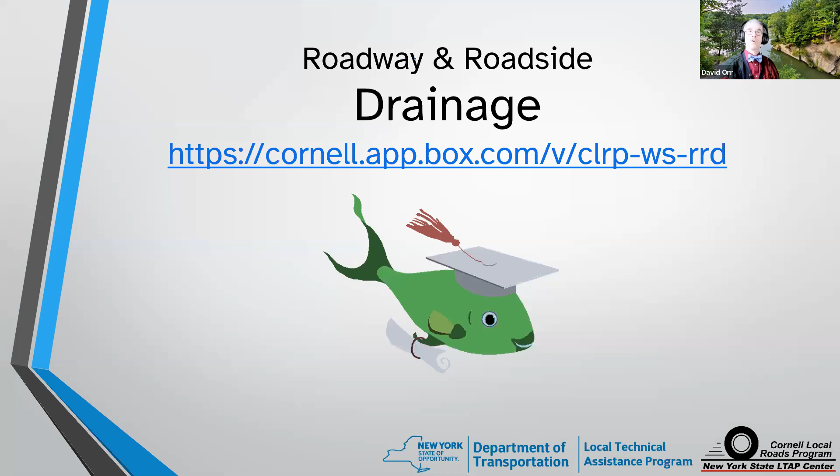A lot of the stuff we're going to talk about today comes from our workbook on drainage called Roadway and Roadside Drainage. You can download it; there's a link to it directly in the chat pod. You don't have to remember this or write it down. You can also just search for it—New York State LTAP or Cornell Local Roads, either one will work. That's what we're going to use. There are references in the back, so some of the things we're talking about come from there. But overall, we're hoping to help you solve your own problems.

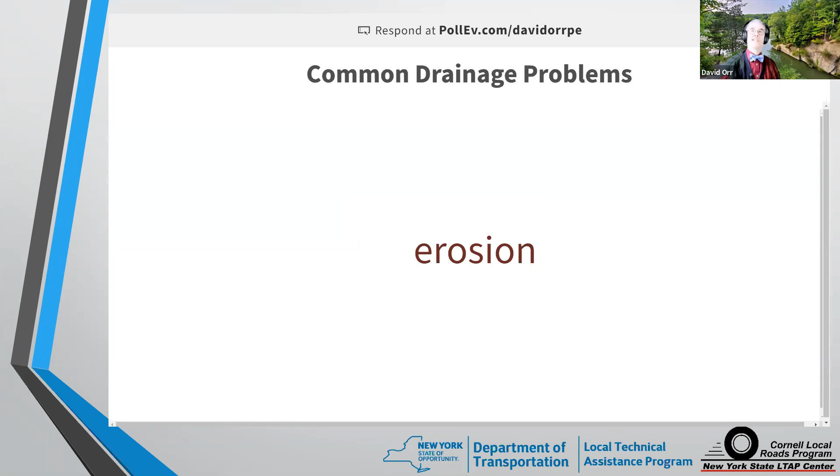Okay, it's all anonymous, and here's our first one: erosion. Yep, that's a common drainage problem. So what kind of problems do you see, especially on roads, that are related to drainage? Sloughs, slides, yep, more erosion. It's getting bigger, a lot of people put erosion down. Flooding, washouts, yep.

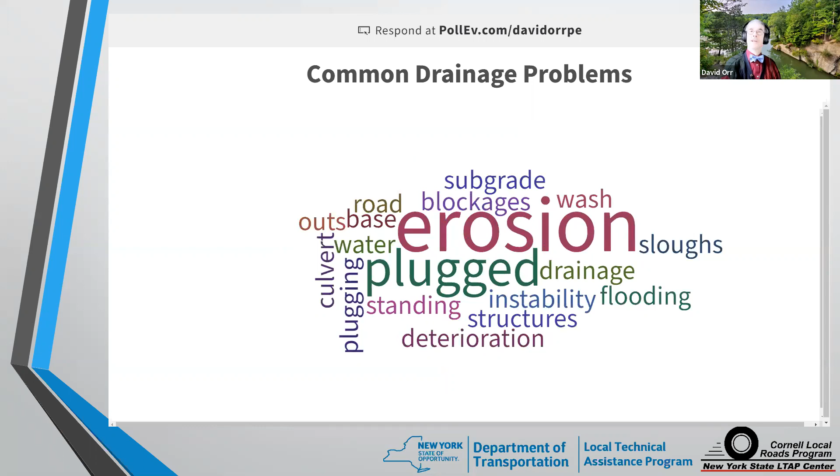Deterioration of the roadway, premature failure, yep. Culverts, structure problems, instability, blockages, standing water, yep. Base issues, yep. Monsoons, floods, yep. Right-of-way issues, which, yeah, if you've got a limited right-of-way, that can cause you problems, okay. Plugging. So obviously, drainage problems are pretty severe when it comes to highways, okay.

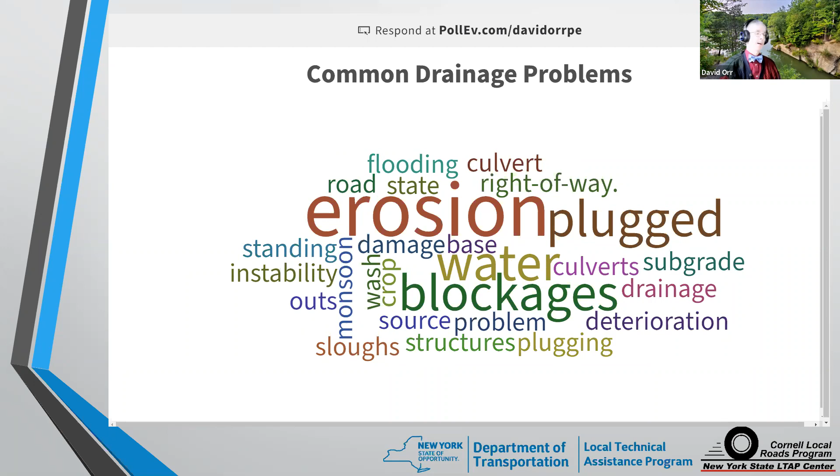Now, when you start thinking about it, look at all the answers we've been given, and that's very true - most of our problems are caused by that. Common drainage problems on roads actually include even more than just erosion, washouts, and culverts. It's actually cracking and rutting of the roadways, heaving. Almost every problem on our roadways is made worse by poor drainage or drainage issues. So what I want to do over this hour we're together is help you solve your own problems.

Now, most people, when we think of drainage, we think of flooding in the spring - actually this was in January, during a January thaw, when you get all that snow melt and runoff and create huge volumes of water. We fear that gets into the roadway system and we wind up with something like this, and we lose the roadway. Yes, that's a drainage problem. But what I really want to focus on are the things we can do ahead of time to maybe keep things like this from occurring.

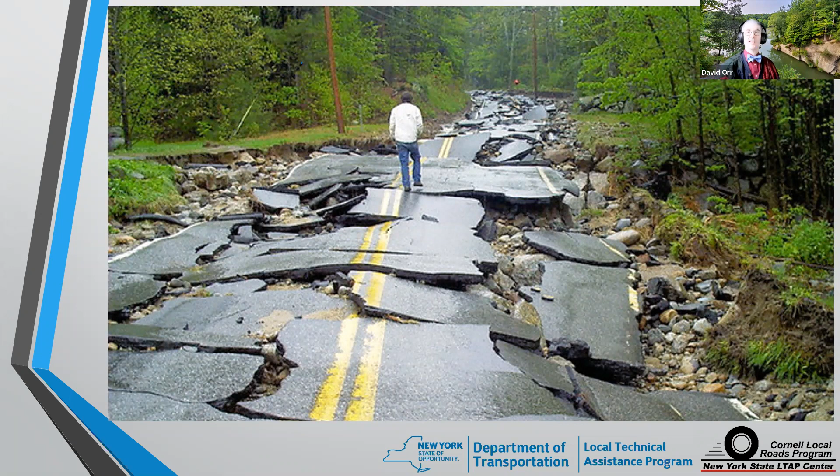Now, of course, one thing that could help is you could employ an army of engineers. Mother Nature has an army of engineers out there: the beaver. But like anything, if something fails, it can actually make the problems worse. So we got to be a little careful with our friends - there are actually times when beaver dam failures can create floods of their own.

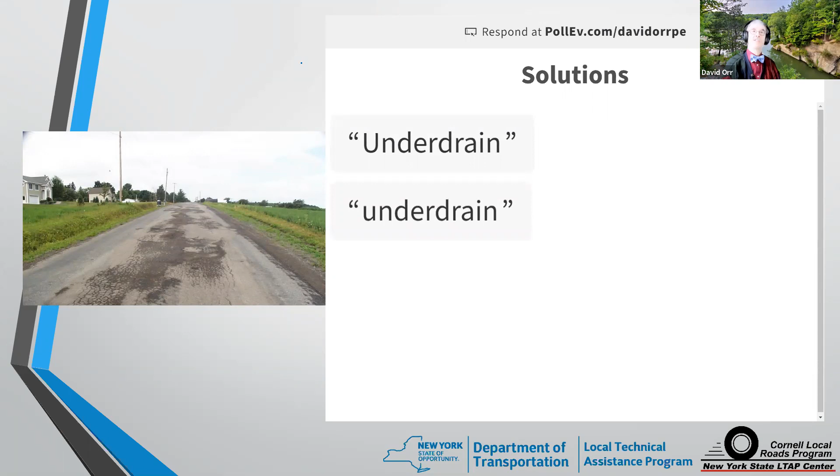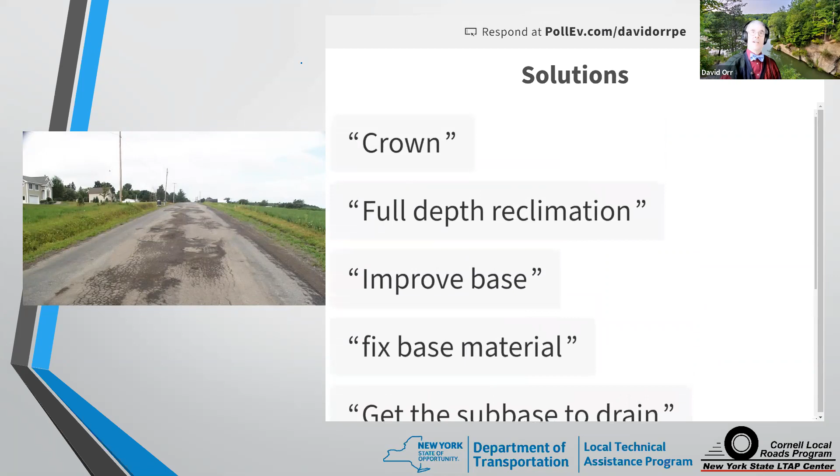A couple of people have put that in - that's good, okay. Maybe a better base, yep, you've got to get that sub-base to drain. Yep, there's water underneath, maybe it's a base problem. Yeah, very good answers - improve the base. Could be a good candidate for full depth reclamation, or sometimes called FDR. Maybe there's not enough of a crown. Okay, so all great solutions.

So let me ask: how do you know whether it's just a crown problem, a base problem, or even if it's a candidate for full depth reclamation? How do you know?

You could do some cores. Cores is a good possibility. You could do a core sample. I like core samples, they're not a bad idea, if you can - and it's not always possible, your budget is definitely part of it.

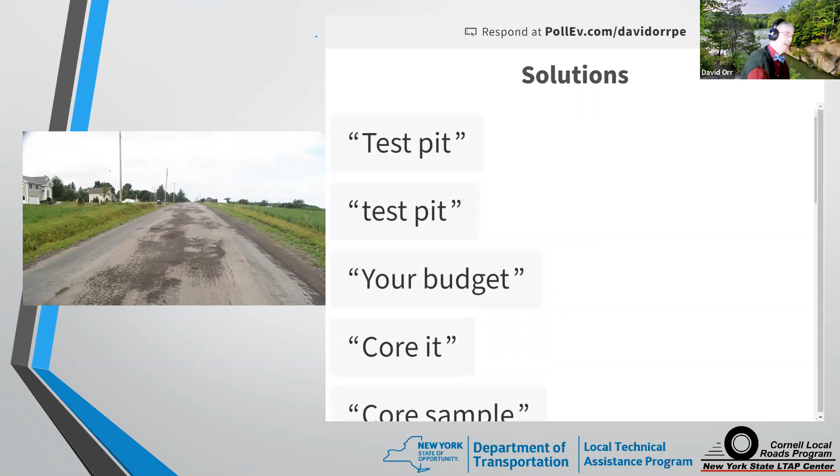I like test pits, and my reason I like test pits is because if I've got a test pit, I can come in and go right across where there's changes and see what's going on. And a test pit, you can set it up so the water drains out if you do it right, so you can see if there's a difference.

It turns out in this particular case, a test pit showed the center of the road, where the bad crack section is, was actually the cleanest. The problem was the outside area was really dirty - none of it so dirty you couldn't reclaim it, but the outside shoulders were really bad, so bad they had to be thrown away.

So as we're talking about solutions, think: how do you confirm what you think the answer is? We're going to stop a couple of times and talk about that as we go through the course of the hour.

Now, this is an old photograph, but you can see a road. This road was chip sealed about 9 months before I took the photograph. We're looking down a hill, road's coming around the corner. Looking at it, what do you think is the problem and the solutions?

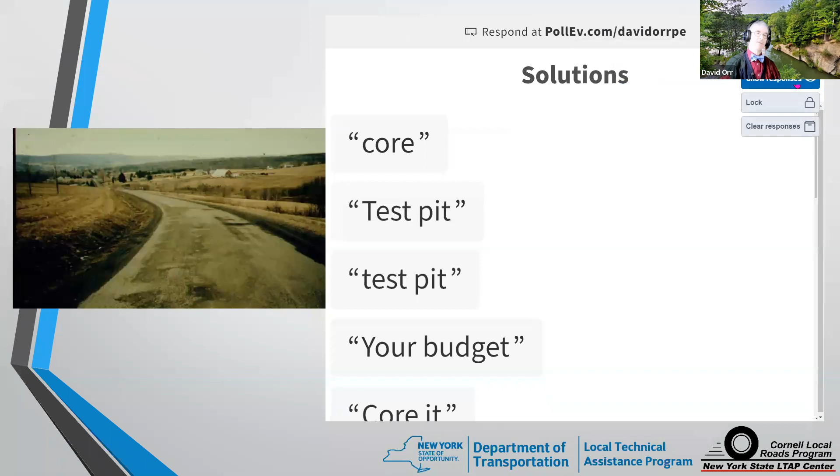Watch this trick, we'll see if this works. I'm going to clear the responses up so we get new responses in. So what do you think the solution is here?

Maybe a full depth reclamation with new gravel? Yeah, it's a possibility. Yeah.

Foreslopes closer to the edge of the road. Maybe there's some problems with the side slopes. Maybe the water can't get away. Maybe the ditches aren't deep enough.

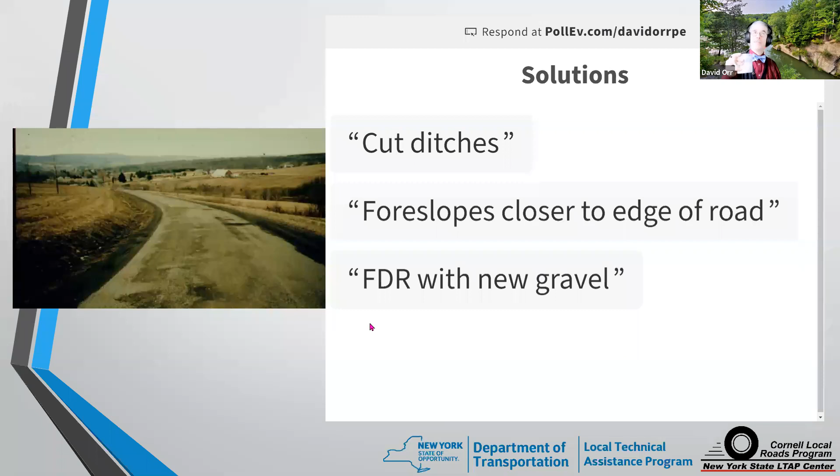It is a possible candidate for edge drains, especially along this inside edge. The hillside, it's always good to look at. Maybe do that.

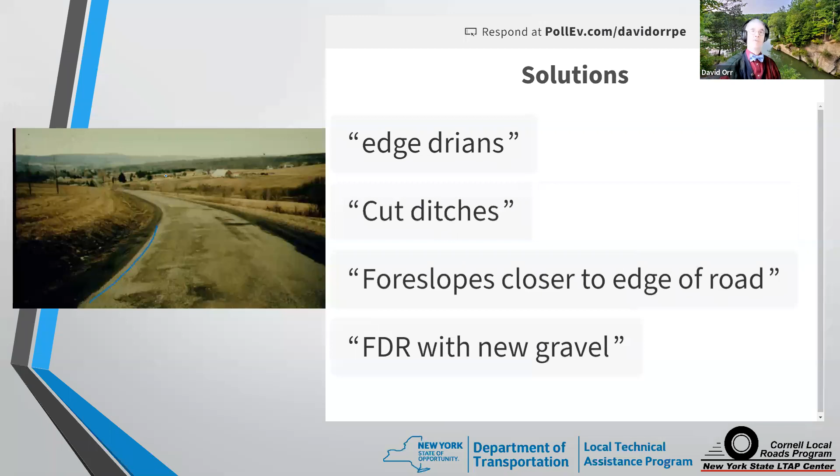Now, a photograph is hard. We're going to see that - it's going to be a challenge for us as we go through. I know that. That's just the nature of the beast.

Just like before, a test pit or a core to see what the fines content is really important. One of the things we know from decades of work is when you look at what's going on, you want the right fines content in your base and sub-base material. Fines, clays, and silts create water problems - they hold on to the water and don't allow it to drain out, even if you've got subsurface drains.

If you've got a paved road, you want to get that fines content under 8%. But if you have a gravel road, you need those fines to bind it together.

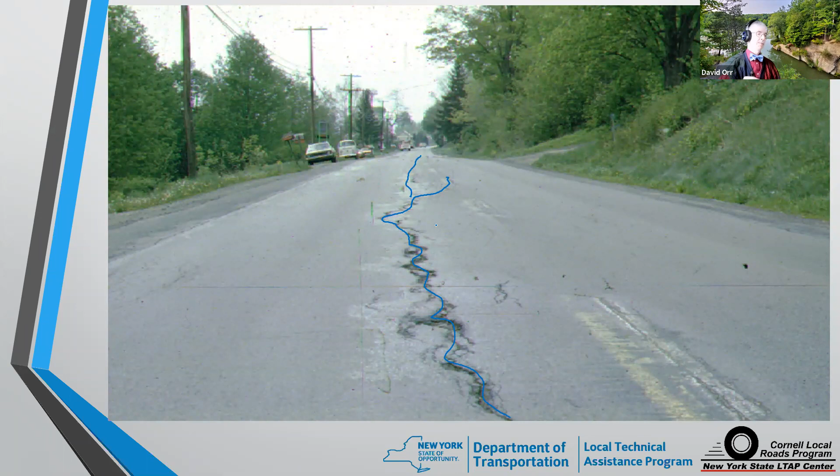So in this particular case, what do you think the problems are? I'm going to clear the responses real quick. I apologize if I got rid of one of yours, so I'm going to make you put it back in. But if you have a question or a comment on a possible solution, go ahead.

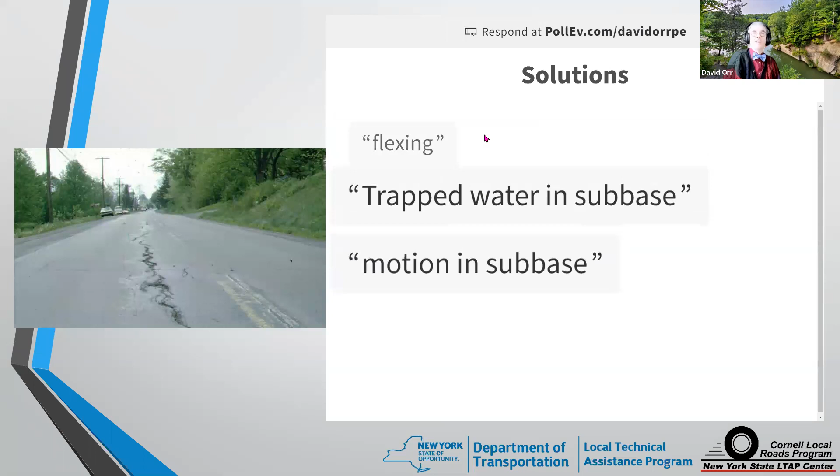So what do you think the problem is? There's movement in the subbase. There's definitely some movement, yeah, some trapped water in there. Yep, absolutely. This is actually one of those trick photographs. It looks like the problem is in the wheel path. Be very careful when you see a crack - just because it's in the wheel path, it may be more common there because of traffic. But if it's moving and meandering like that, it's probably more likely due to other things, like motion in the subbase flexing. In this case, it's actually frost heaving. And yes, it looks like the cut and fill is failing.

Crack sealing is a possibility, but the problem is it's too late. If you think about all the cracks, how parallel they are, if you put them all together and they're more than an inch wide, it's too late. And if you think about it, all these cracks are way too wide. You have to get to them much earlier.

And then, of course, what's the underlying problem? In this case, there's movement between the cut and the fill. If we looked at this from the natural landscape - see if my pen will work right here - it goes from a cut on the right side of the photograph to a fill on the left, and they move differently in the winter due to heaving.

Long term, that's going to be hard to fix, but short term, it might be worth thinking about where that water is coming from. Anytime you've got a side hill situation where the land around the road is tilted from one side to the other, think about catching that water before it gets to the roadway. Maybe a subsurface drain here on the uphill side could be very useful.

They've done some crack repairs, but it obviously didn't quite do what they hoped it would do. And of course, what does this lead to? Well, if you get enough water coming out, you can actually get something like this. This actually was sent in - it's an actual county road, and the water coming out was actually clear. This is water pushing the asphalt up in the spring - a frost boil that's blowing up into a big frost pimple. Again, catching that water before it gets to the roadway is something to think about.

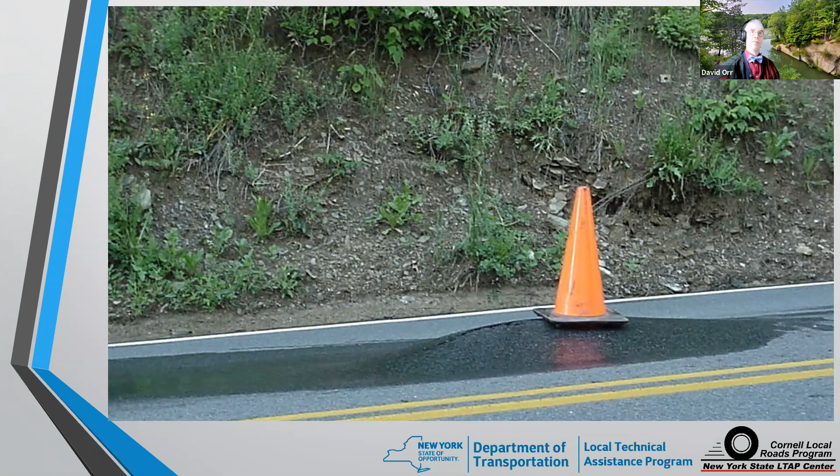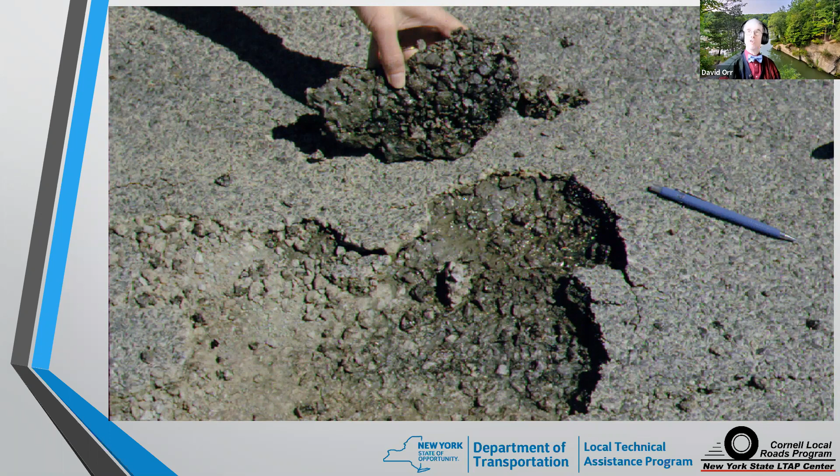Now, of course, that can lead to potholes. So our next problem we're going to look at is a pothole. Now this is a shallow one - we've seen deeper ones. But when you see a pothole, especially with a little bit of water in it, there's a couple of possible solutions beyond just patching. I know you may just patch it short term, but longer term, what do you think the solutions are here for this particular type of situation? When you see potholes, what are you thinking about?

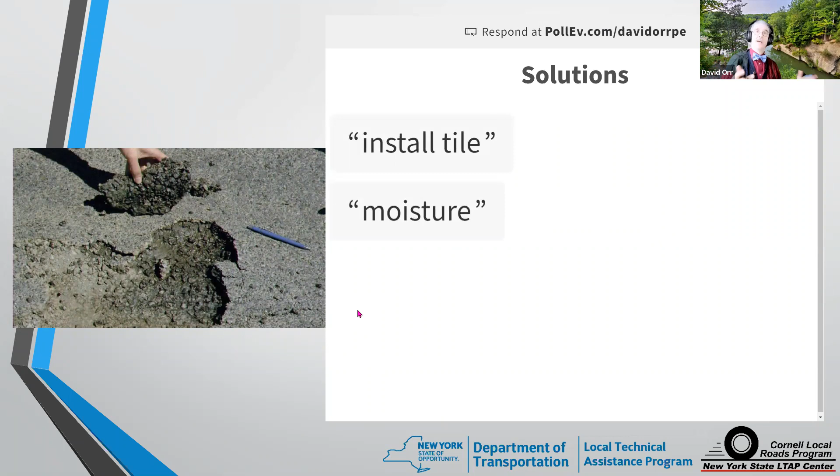Moisture - it almost always comes back to where it is. So you could install tile. That's one of the primary ideas here, or a French drain, which is frankly a subsurface drain that typically doesn't have a pipe. You want to remove that water from the subbase. It could be due to an ice lens freezing underneath, or it could be a base problem. And this is the key - you've all hit on it, really nice job.

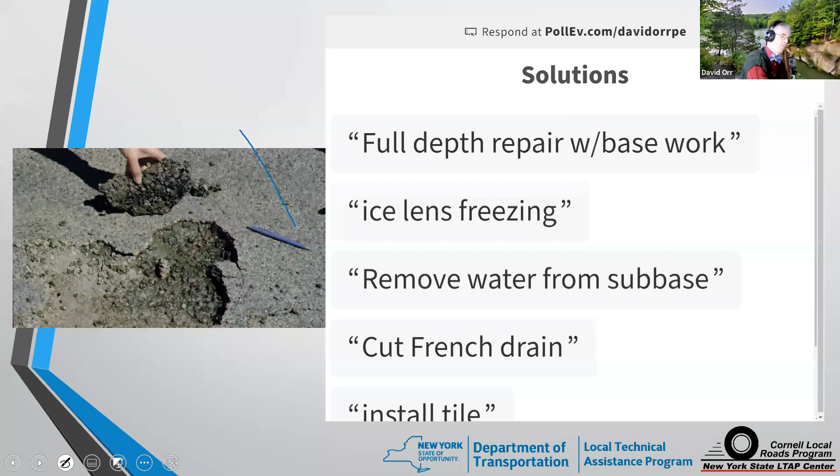If the problem is water coming in from the side, like we saw with that road pimple, the idea would be to install a French drain or tile to catch the water before it gets to the roadway - intercept it. So one possibility is to put a subsurface drain, figure out where the uphill side is, and cut it off. So possibility one would be to put in a drain. I don't know why the computer decided to do that, but we'll live with it. So we put in a drain.

Okay, but if the problem was a dirty base and you put a drain in, what are you going to have next spring? You don't need to put it in. You all know you're still going to have potholes because you've got a soft base. You can't get rid of the water with a subsurface drain if it doesn't want to let it go. If you got a lot of silt and you got a lot of clay, you're going to have more problems.

So make sure you've got the right solution for the right problem, because the other solution here is to just put in rehab, which could be a FDR. It could be boxing it out. Depends how big of an area it is. But bringing in full depth repair with base work, as is in the solutions list.

If, on the other hand, you hadn't checked and you thought the problem was a dirty base and you replaced what was there with clean base, but it turns out it was already a clean base, and the real problem was side water coming in, what are you going to have next spring? You're still going to have potholes. And so you need to make sure the solution matches up to the problem. That's really important, okay?

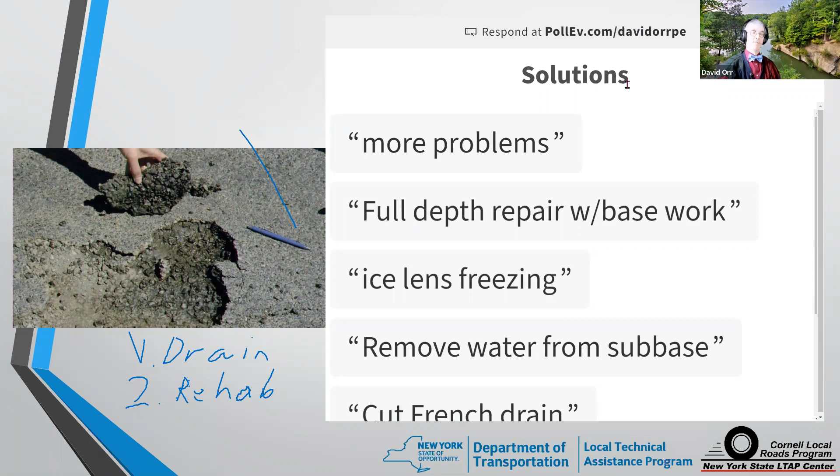So let's go to our next idea to think about. Let's talk about subsurface drains a little bit. This is a subsurface drain, okay? Now, we'll talk a little bit about backfill and subsurface drains. We don't have a lot of time in a 1-hour class, but when I see things like this, I go, ooh, what's going on here?

Now, just for the sake of argument, the water is coming from the right side of the photograph, going to the left. That's a driveway culvert, okay? And you can see there are actually 3 subsurface drains there. 1 white that's got water coming out of it, and 2 black. So what do you think the problems are here? What are the solutions for subsurface drains? I like subsurface drains, but we need to be careful when we install them. What are the concerns here?

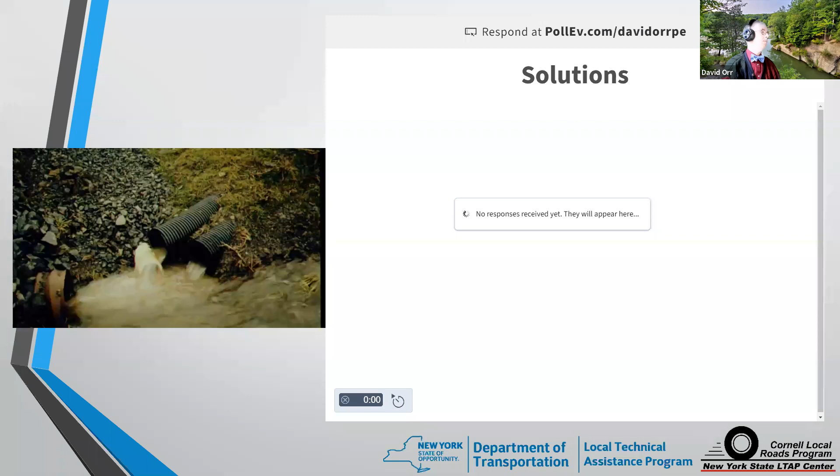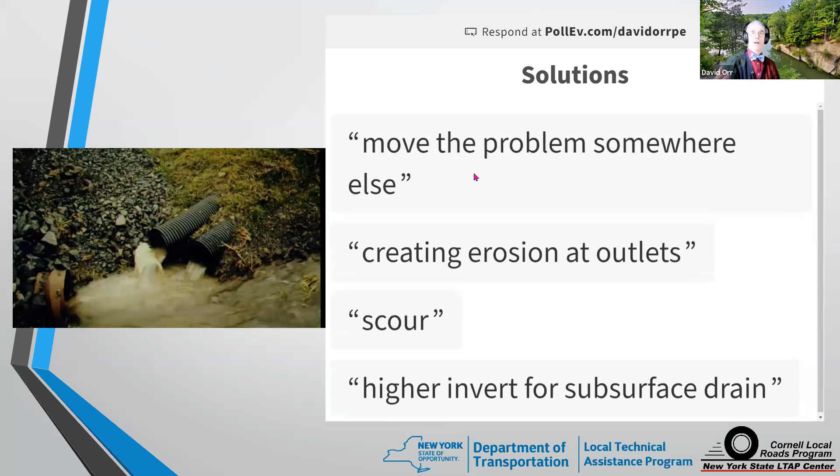You need probably a higher invert. A rule of thumb is you really want to have that 6 inches to a foot below the bottom of the ditch because you know it's going to fill in over time. And by just having it dump out, you can create an erosion problem, okay? And you may be moving the problem. And white pipe is scary. Is that a leach outfall or did they just cheap out?

Anytime you don't have black pipe and you expose it to sunlight, it's going to break down. By the way, the same thing's true with your hard hat when it's not black. Now, I wouldn't wear a black hard hat because it's too hot in the summer, unless maybe you're a Pittsburgh Steelers fan. But they break down.

We add the carbon and other chemicals to help it survive in the sunlight. But if you don't have that, it's going to get brittle, and that white pipe is not long for this world. So really, it's the white one concerns me for a lot of reasons, I agree. And of course, none of these have animal guards on them. And so that would make me nervous as well. Okay.

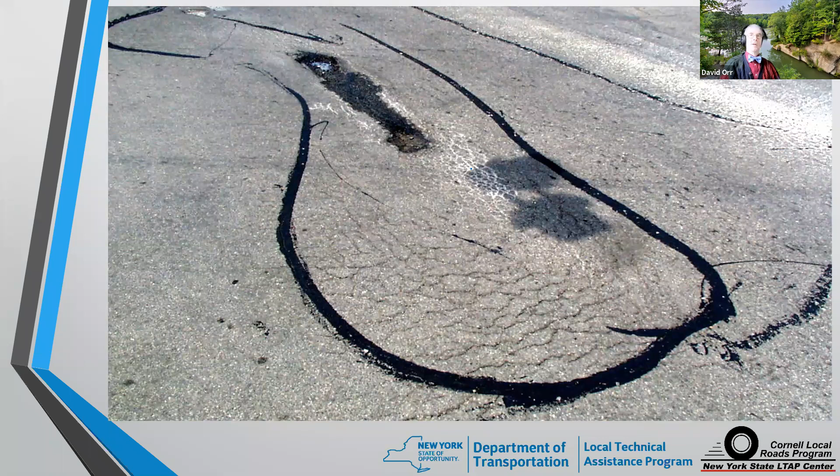Now, again, we don't have a lot of time to talk about it. We're just trying to go basic problems. So now we see a roadway like this. Okay. Cracked. Somebody's done some crack repair. So I don't think crack repair was the right solution here. What do you think is the right solution? And let me clear the responses. There we go. What do you think the proper solution is here?

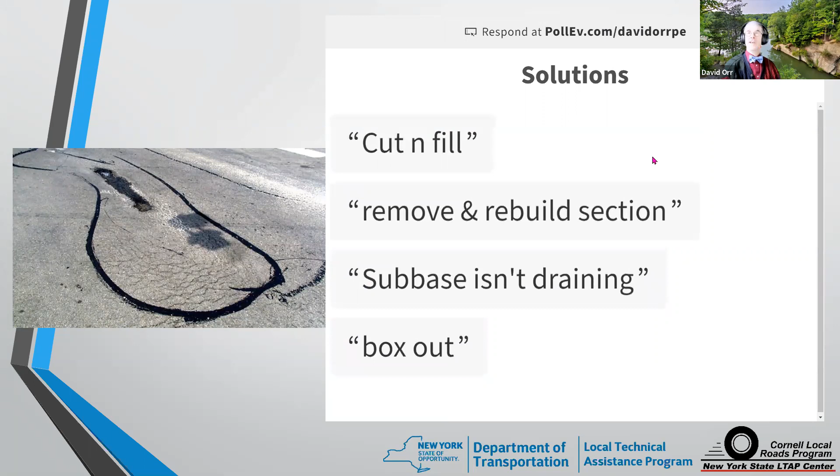You probably got to box it out. Yeah. The subbase isn't draining. In fact, if you look there in the upper left of the photograph, that's water coming out of the roadway. So you're probably going to do a cut and fill or a box out, a full depth repair. How much of it you have to do depends on the length of the roadway that's got the problems. But the reality is, you crack repair, it's too late. And again, that rule of thumb is pretty good.

Just take the cracks and combine them together. And if they were one crack, would they be more than even 3/4 of an inch to an inch wide? If the answer is yes, it's too late. You got a bunch of parallel cracks like this, it's too late. It's already alligatored, as they say. So really, you need to do more than just crack repairing it.

What's even worse is the day after I took this photograph, the agency that owns this particular roadway overlaid it. And of course, within a couple of years, evidence came back. That pothole showed right back up. The cracking showed right back up until they did something much more extensive to fix the problem more permanently.

Okay. I like crack repairs. We don't do enough crack repairs, but pick good candidates. And if at all possible, give yourself at least one season between when you do the crack repairs and any kind of overlay work. And that includes a chip seal. Anything you're putting over the top, give that crack repair time to cure out.

So a great time to do crack repairs, if you want the chip seal or overlay this year, is once the weather breaks. It's actually a good time because the cracks are at about the right width if they're moving as well. So something to keep in mind. Okay.

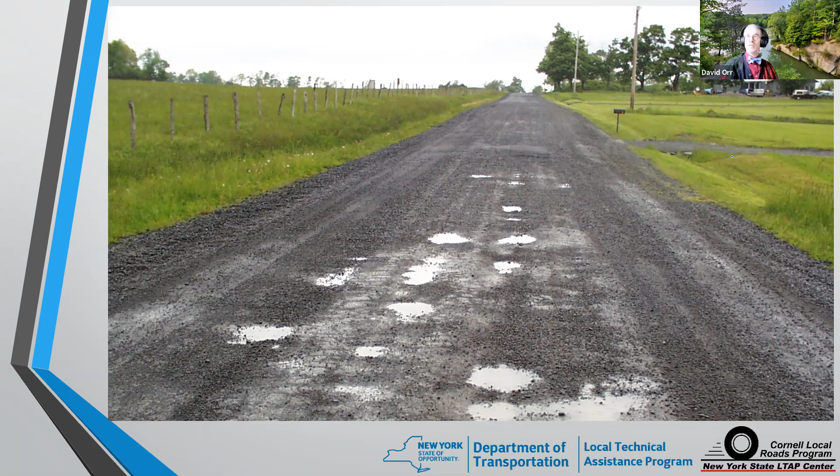So we're going to look at a couple of different road problems, and then we're going to talk about both of them together. So here's the first road. You can see it was a chip sealed roadway, or at least it had evidence that it had been a chip sealed roadway at one time, but the chip seals completely failed. From what I can tell, talking with the highway superintendents, the chip seal never really worked, probably because the base was really better for a gravel road surface. But the problems they're getting now aren't necessarily just due to the quality of the gravel.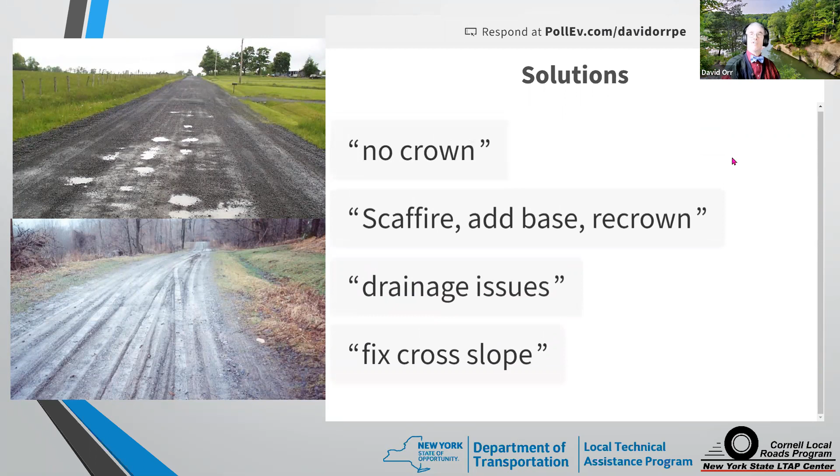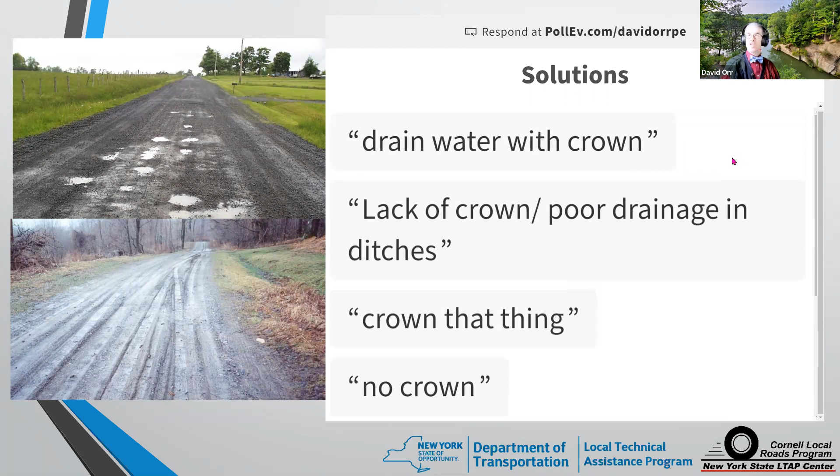Yeah, it's a drainage issue, and the real issue is the cross slope. You got to scarify it. You may need to add base, but the real issue is the crown. Gravel roads, especially, need a crown. And it doesn't matter how good the ditch is. There's a couple places on this ditch that could be better, but the big issue is the crown more than anything else. Gravel roads need a crown. I'd rather see it crowned all to one side.

Here's a photograph taken this past year, and you can see there's a crown on the roadway. That's going to make a big difference. Now, one thing you can note, this is one of the hardest things to do on a gravel road. When you're coming around a corner, because you want that safety with the super elevation, it's hard to not put in a flat spot. So it's something to be aware of and be very careful.

Best thing to do, because it's a gravel road, put it in, check it, and then plan to go back after a year's time and see if it's starting to pothole up. It's relatively easy to fix early with a gravel road. If you wait till the potholes get deep, remember you have to scarify under the depth of the pothole. If you can catch it early, you might just be able to do a little bit of small scarification, put a little gravel, get that crown in there, and walk away. Okay? And as soon as the grass grows, you're in pretty good shape.

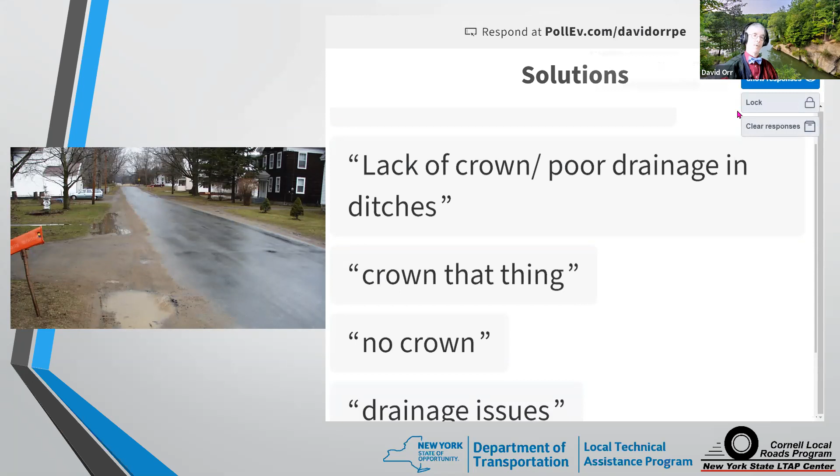Okay, so now we're in more of a hamlet area, or the edge of a village. What do you think the problem is here? Let me clear the responses here real quick. So what do you think the problem is here? No drop inlets? Yeah, in an urban area, whether it's a hamlet or a village or a city, we need to get the water away from the roadway. And a lot of times we have problems. We can't put a ditch in.

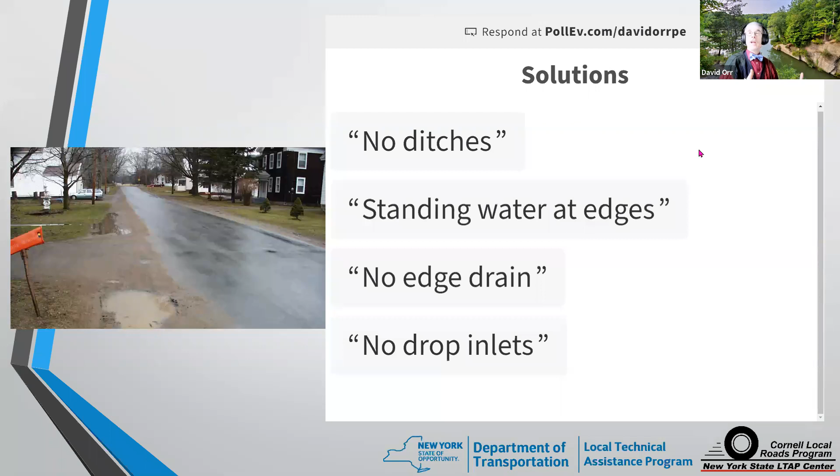You have nowhere to really drain the water. You have nowhere to put the ditches. You may even have curbs and gutter. And so you're going to have to think about subsurface water systems, drainage systems to collect that water. You might be able to get away with a swale in a lot of cases, and you might even be able to put a swale off the roadway. Okay. But you got to think about that water.

You can put an underdrain system in, but realize you need to design it for the volume of water. That surface water is more than most subsurface drains really like. So you may need to account for that and put larger pipes in and think about the outfalls quite a bit. How do you keep the water from the road and how do you take it away? Because that standing water is obviously going to lead to a premature failure. Okay, nice job.

Now, let's clear this and look at the next photograph. So this one, not going to be a solution this time. This is a shoulder on a roadway. Now, it's not a curb and gutter, but we'll come back to the fact that they're similar. What is the purpose of a shoulder? This time it's not the solutions answer, it's what is the purpose of a shoulder? There should be 4 answers here, I hope to see. What is the purpose of a shoulder?

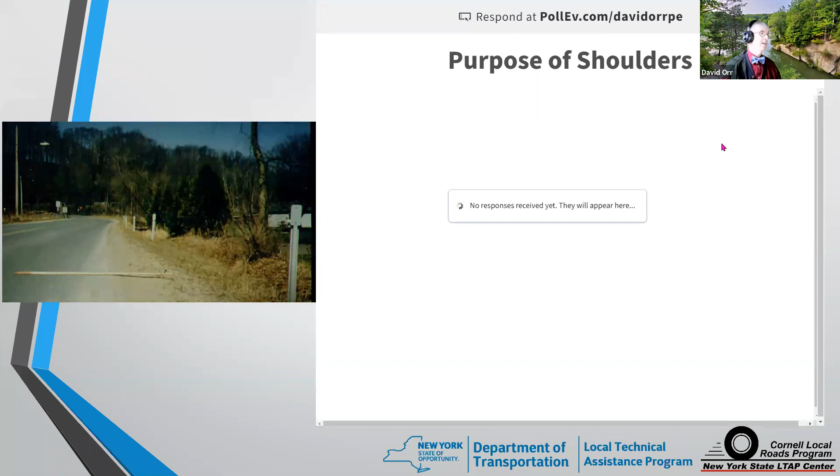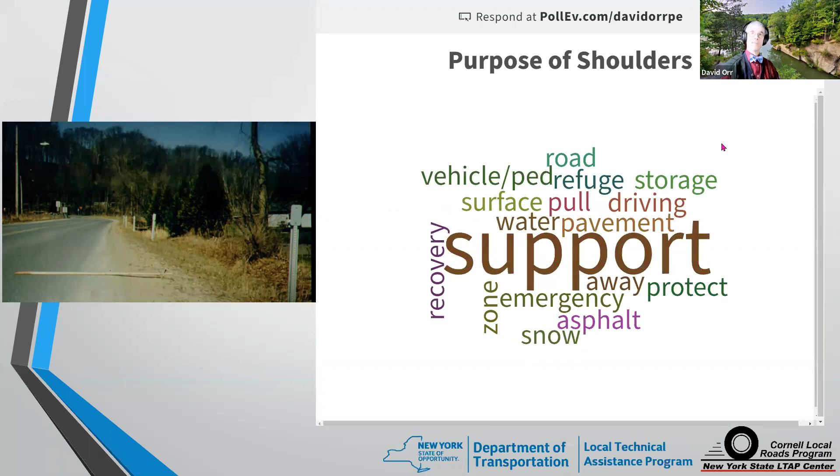Snow storage? Yep. That's usually one of the last things we think about. Okay. Storage, recovery for safety? Absolutely. You know, that errant driver who's paying more attention to their cell phone? Yep. It provides lateral support. It actually helps hold the pavement in. Okay. If you get edge cracking on your roadway, it's probably because your shoulders weren't compacted or your curb and gutter weren't placed real well. Yeah, nice job. Good answers.

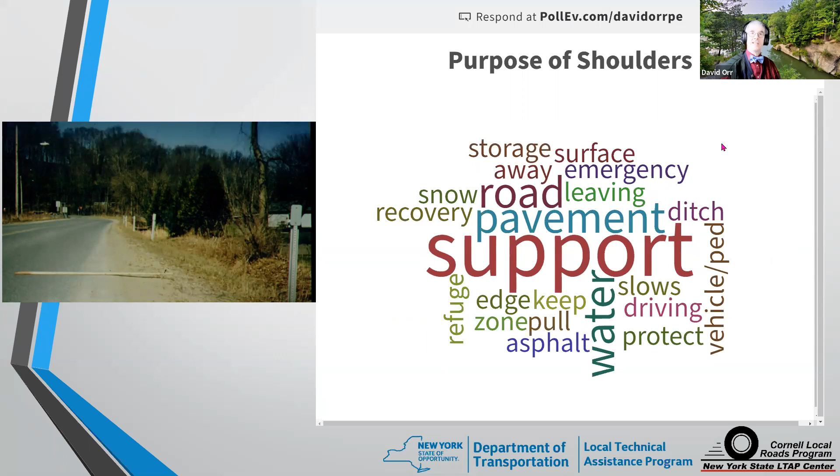Emergency, edge of the roadway, helps the asphalts. And of course, it takes the water away. It's a drainage issue. It takes the water from the road to your subsurface drains, gets it off the roadway. Okay. So yeah, nice job. That's what the purpose of a shoulder is.

So if you're going out, you're looking at your road system, especially as we start to get towards the end of winter, we know we've been using sand, and even with salt, there's a buildup, and we start getting buildups like this. We need to think about cutting those shoulders down so they're actually doing the job. Because obviously, if the roadway is completely covered on the side, water can't get away, the roadway begins to crack, as you can see in here, and we could drive ourselves nuts. If you start looking at this, it's too late to crack repair it. And a lot of that is caused because the water is trapped on the roadway.

So as we get towards the end of winter, think about where you want to cut your shoulders, get that water off, do it properly with your grader, and go from there. Okay?

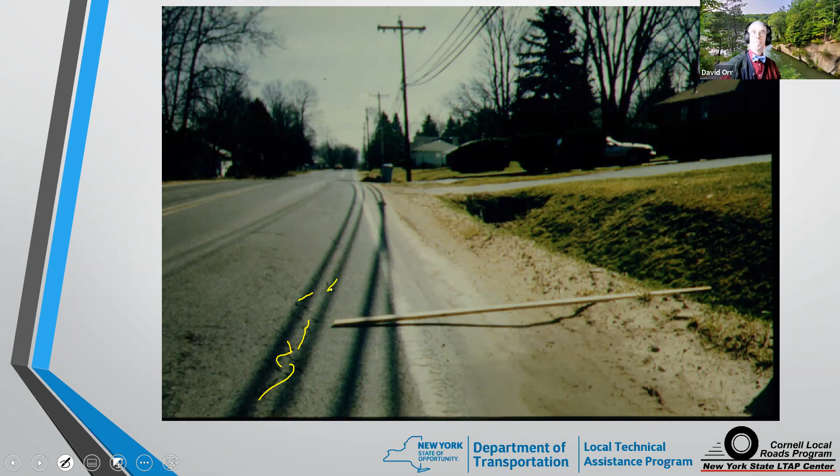So now let's switch gears, and now let's talk a little bit about culverts. Okay? And is your culvert big enough? So if you know, just let me know, what is your design storm for culverts underneath the roadway? Okay? Not the ones for driveways, but what's the most common design storm for culverts underneath your roadways? Okay, let's go see what we got for answers here.

Okay, so most of you are trying to do 50-year designs underneath your roadway. Okay, that's fine. 25 years, pretty common. So a few of you 100-year. We should actually be designing our culvert sizing to match up with the risk that we're willing to take. Okay. Really, probably even a small town probably should have different size storms that they account for on different types of roadways. Now, when I put in the percentage behind the year, that's done on purpose. It's a phrase we're starting to use.

Instead of the design storm of 10-year, we're calling it a 10% storm because each year is unique. What are the chances in a given year that you're going to see flooding? And we know we're going to see more extreme events with everything that's going on. We need to account for that. The averages aren't going to change much, but that means we probably need to put slightly bigger pipes in. Not huge, because you don't want them oversized, because you're going to actually create problems downstream. Okay, so it's just something to be aware of and keep in mind. You might want different size pipes.

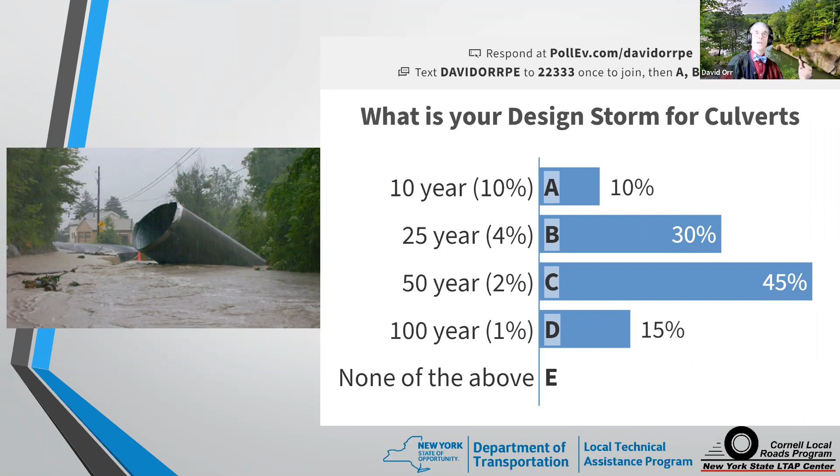Less risk, bigger pipe. But just as important is how we install those pipes. Okay, so here's a pipe, you can see a photograph. There's my snuck-in picture, I do this whenever I can. That's actually Lynn Irwin, our old director, sitting at the far end, staring at me. We were looking at this culvert together. We noticed a couple of things. What do you notice as might be a problem here? And what are some solutions once you've put the pipe in?

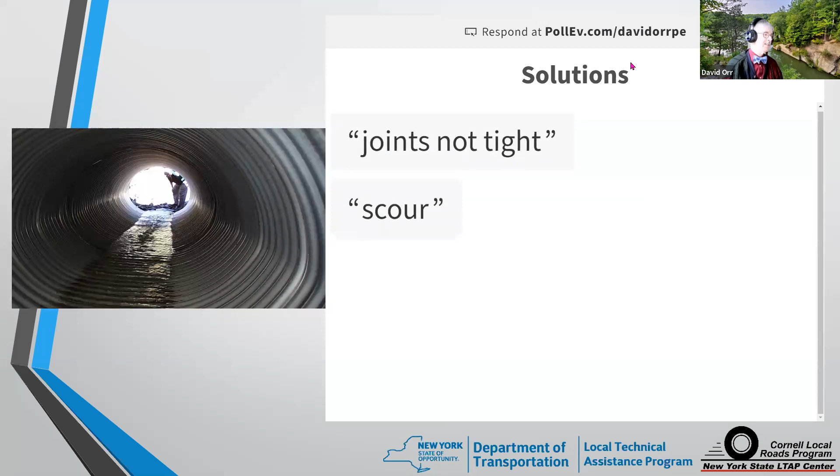Possibly a scour. The joints were a metal collar, they weren't great. We were really concerned about the structural support. It's a corrugated pipe. Some people don't like corrugated pipes, but if you have the proper lining and/or gauge thickness and material type, corrugated pipes actually have very long lifespans, but you've got to match them up to the soil conditions.

The state's highway design manual actually has a really good chart to help you figure out the right gauge and coating for your particular pipe wherever you are in the state. If you're in the southern tier, for instance, you need thicker pipes and different materials and liners than if you're in places where the acidity or pH is different.

Okay, good information. Go a little thicker. It's really cheap insurance. Get a good lining, either a polymer, asphalt, or even concrete, but protect that pipe. It will actually last the 35 to 50 years you want, as opposed to 10 or less.

Okay, so put in the right material. I would tell anybody anywhere in New York State, if you're putting in corrugated metals and not going to put aluminum pipe in, put in aluminized steel type 2 at least. And go a little thicker gauge than you might otherwise.

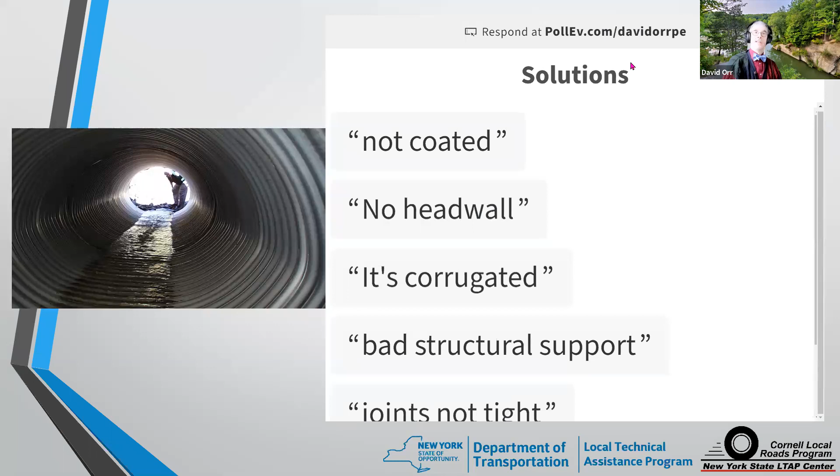But the thing I'm always concerned with is these pipe arch pipes, sometimes called squashed pipe, because that's how they make them. When they squash the pipe, they sometimes put in a bit of a crease. You can see the crease there, there's a bit there. Those are prone to issues.

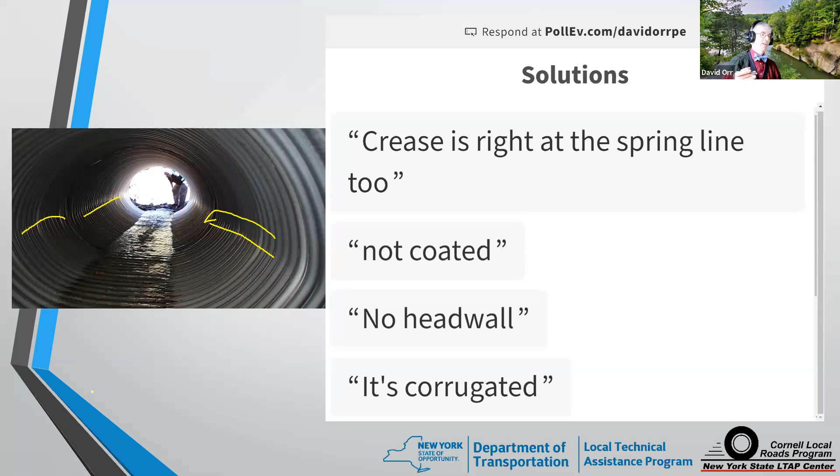We've all done it, I'm not going to say that we don't have pipes in all over that have this issue. But when you start and put those in, it's better not to have that. If you do have that, you really need to start watching very carefully how that pipe does over time. And the crease is right at the spring line too, which is one of the worst places. So when they fail, they can fail very dramatically, like this guy here, where the support was lost underneath.

So when you get those pipes in, you might want to have some limitations on how much of a crease you allow. And if you backfill them, you've got to backfill them very carefully and make sure you don't lose support underneath. We should be inspecting our culverts on a regular basis.

We don't do that enough. The bridges all get inspected every 2 years. We really should be looking at our culverts, maybe not every 2 years, but certainly anytime we're doing major work on the roadway, have somebody go down the road and look at every single pipe, including the driveway pipes. And if it's not going to last until the next time you expect to do major work, that's time to start replacing it.

In fact, if you can do so, it's actually really good if you do your inspections even in the winter when it's not snowing like this year, replace one year, and then do all your road work the following year. Yes, that's a 2 year cycle, but you really get good work then. You get yourself time. Money is tight, time is even tighter.

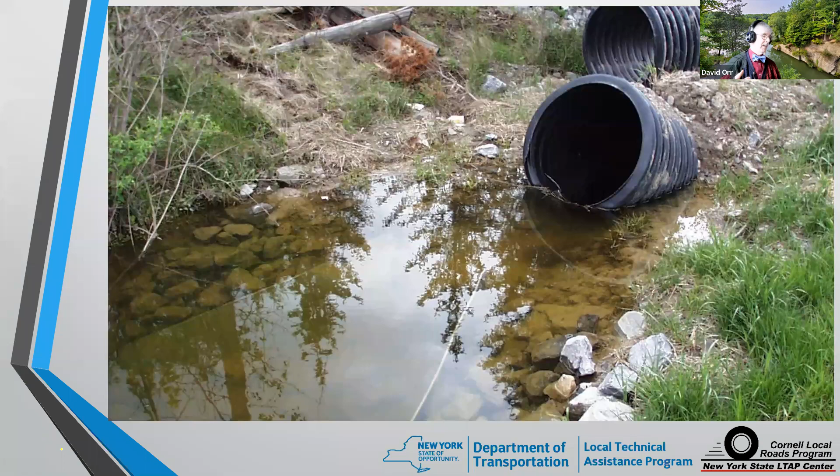And of course, the installation is really the key here. The installation of pipes, how you install them, really matters more than anything else. So keep that in mind as we're going through. Take your time, do it right, and we'll go from there.

So now let's look at our next problem. I just realized the picture on the next page, where we're going to talk about solutions, I forgot to change it out. So it's not this picture. I'm going to activate the slide, but do me a favor, keep this picture in your mind, not the shoulder picture. Let me clear the answers here real quick. But remember, we're looking at the picture. I'll go back when we talk about the actual solution, but this is the picture I want in your mind, this water like that.

So what's the problem here? And don't look at this picture. Ignore that man behind the curtain. What are the solutions for this problem?

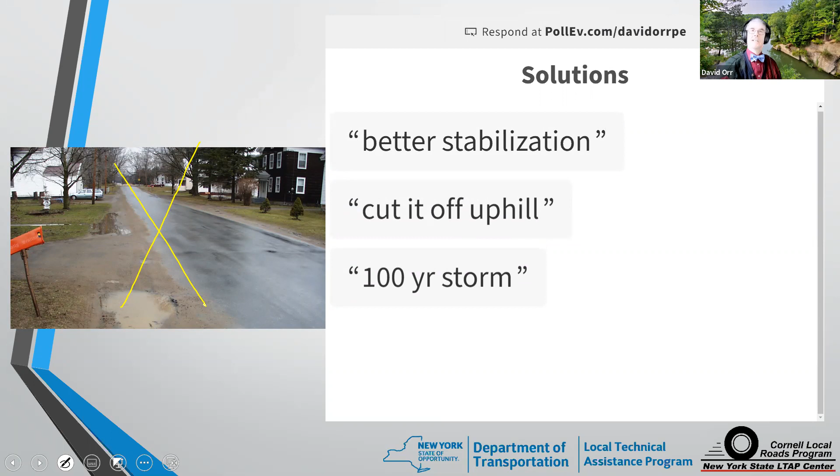Okay. Yeah, that could be a 100-year storm event, and if that happens, yeah, that's a problem. Cut it off uphill. Yep. Better stabilization. Yeah, larger ditch capacity. You should be able to keep typing in solutions if you've got the website up. It should still be active, I think. Let's just see if somebody puts in an answer. If I go back, does it still show up? Yeah, it does. Okay, so you need to look where it is.

The rule of erosion is pretty simple. Once you see the erosion, you obviously have to fix it. But what you really want to do is go upstream until you find the point at which the erosion started. That's where you need to put your solution. Once you see brown water, there's erosion somewhere. It could be caused by exposed earth and rain hitting it, it could be caused by sheet erosion, it could be a pipe that failed. But you got to work yourself upstream and cut it off. Otherwise, you're going to be fighting with it all the time. And of course, once it's eroded, it's really hard to fix.

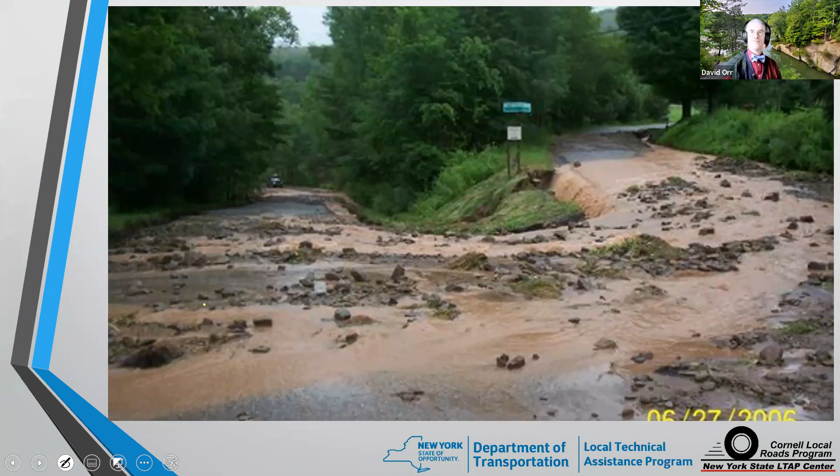So yeah, you got to think about diverting the water, maybe ditching, all kinds of things to look at. If you've been to the roadway and roadside drainage class, you've seen this picture. This is the classic example. It erodes even worse behind where I took the photograph. But the real problem isn't where the erosion is occurring here along the roadway. The real problem is way up here by the gentleman in red, where the water couldn't get off. There was a false ditch, and now the water gets into the roadway or into your shoulder. And once it gets in there, it erodes like crazy. And that's the problem for us.

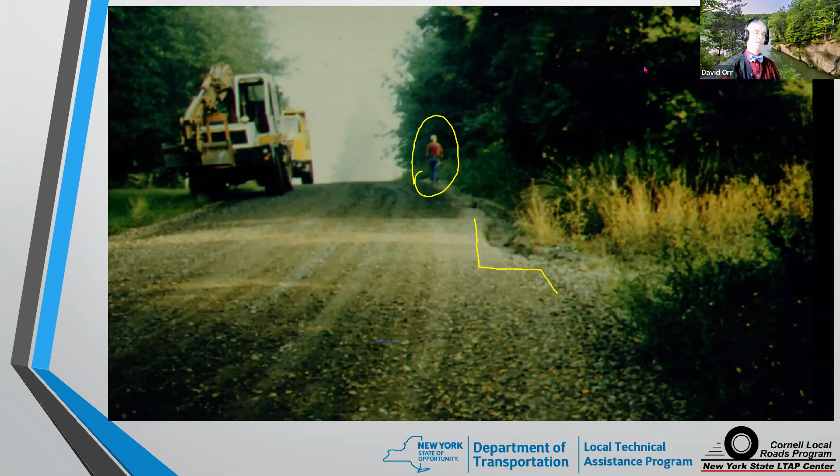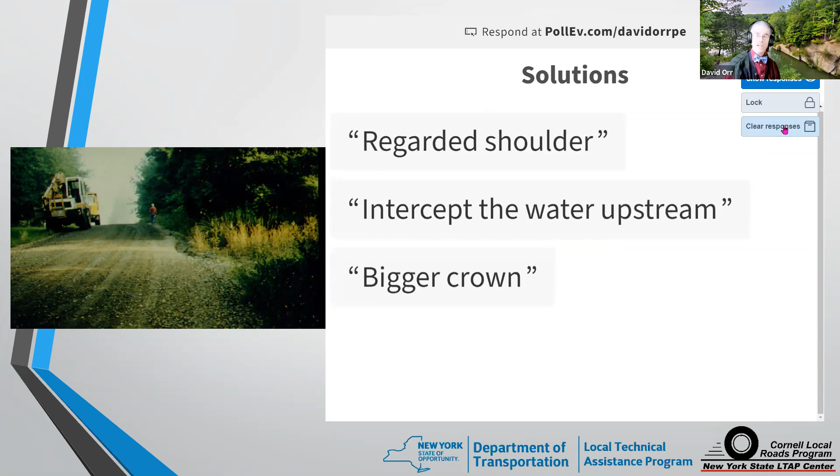So now in this particular case, what do you think the solution is? Let me clear the ones you've got already. What do you think the solution is for a problem like this? What would you think about doing here? Bigger crown. Okay, intercept the water upstream. You got to regrade that shoulder. Yeah. Vegetation control, cut down the high shoulder, especially get those false ditches, get those built up. You may need to do a little bit more mowing or careful plantings that let the water through but don't create a buildup.

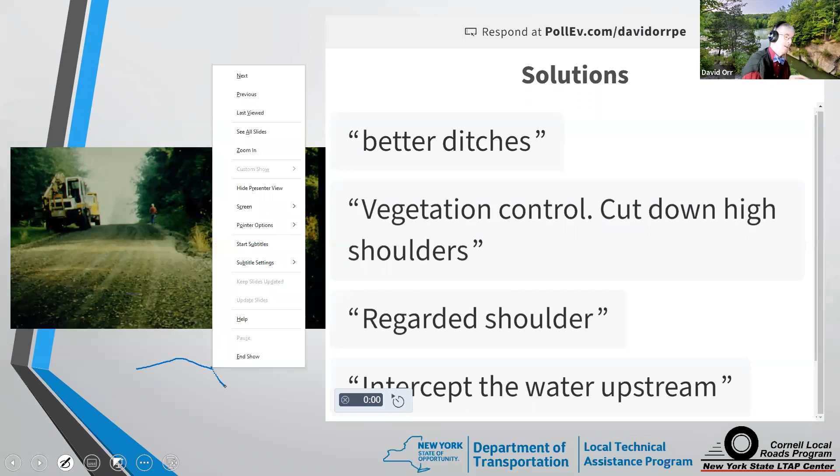Better ditches, possibly. Okay. One of the things you always need to think about, and I'll change my color back here again to blue, is that the crown on the roadway, we talked about the crown earlier on the gravel road, we want that A shape. But even at the edge of the shoulder, I'm going to exaggerate it, we need an extra crown. We actually need that extra crown because otherwise it builds up over time. And once it builds up to being as flat as the roadway, we get a false ditch, and that's where the erosion starts. So we need to make sure the water can get off the roadway.

And then once it is off the roadway, we need to make sure we've done something like you talked about. I got 4 letters for you. They're really important letters, keep them in your mind. If you don't know these 4 letters, you should get to know them.

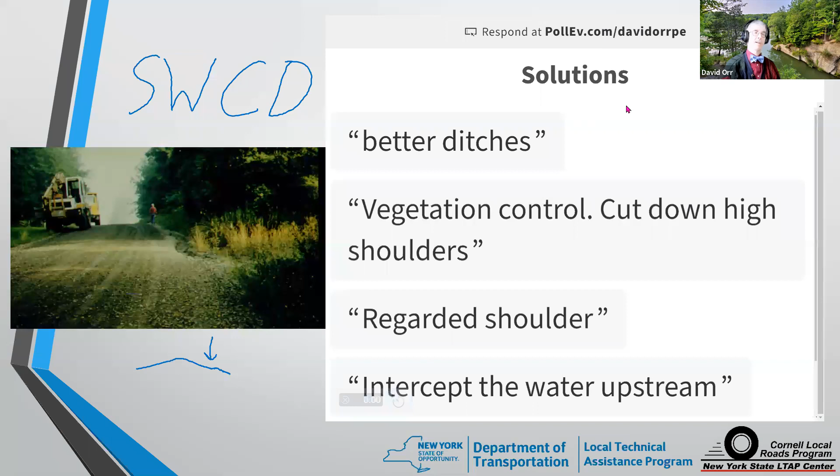Soil and Water Conservation Districts, or SWCD. Almost every county has one. If you don't know the folks at your local Soil and Water Conservation District, get to know them. They can provide you assistance, they can help you design things, they can help you find resources. Otherwise, the biggest thing they need is time. You can work with them, they can work with you. I'll actually show you a project we did with our soil and water when I worked over in Yates County here before we're done here. Okay, all kinds of things to do. Great group to work with. So keep them in mind as we go forward.

One possibility is you could line that ditch with gabions or stones, put in diversion ditches to take some of the water away so it doesn't keep going down the road and building up volume and velocity. You put a series of these diversions in to bring the water away over time so it still has safety, doesn't have erosion, and it helps the water get away from the roadway. It's a win-win for everybody. So all kinds of things to think about doing, and just keep in mind, deal with your soil and water conservation district.

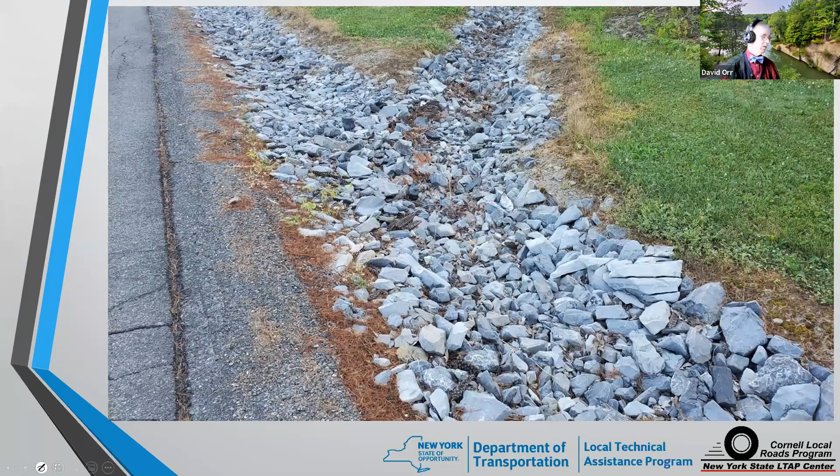So, lovely looking ditch. Somebody really good with the backhoe. The backhoe work here was excellent. But long term, there could be a problem here. So what do you think is the problem, and more importantly, what is the solution for something like this?

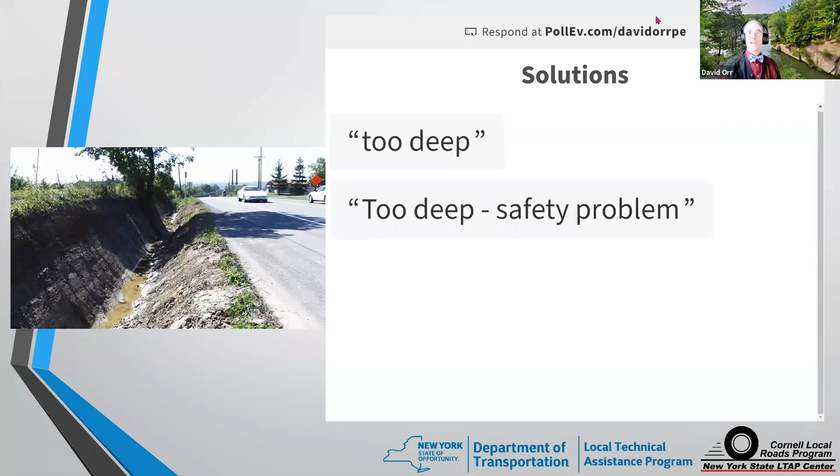It's too deep. It's a safety problem. Yeah, first and foremost, our ditches don't need to be that deep. All they need to do is get in below the base of the roadway. And of course, if you get too deep, the slope is not stable. So not only is it a safety issue if a car goes off, but it's not a stable area.

In a mile of ditch, before you can even see the erosion, you're going to get about 30 tons of material eroded away. Thirty tons. Well, 30 tons of material is an awful lot of stuff. So you're going to have to stabilize that bank.

It's not sloped well from either side of the road or the back slope. A lot of issues here.

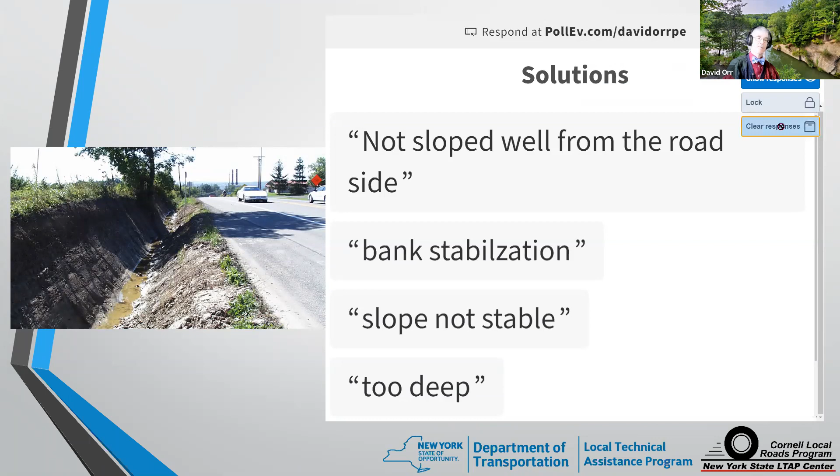And I'm going to ask you, why is this very common? Why do we see ditches that are steep like this? What do you think is the constraint that causes us to put in such narrow, steep ditches? Somebody mentioned it way early on, and yeah, lack of right-of-way. That right-of-way gets us into a lot of issues. And on most of our town and a lot of the county and village systems, the right-of-way is by use.

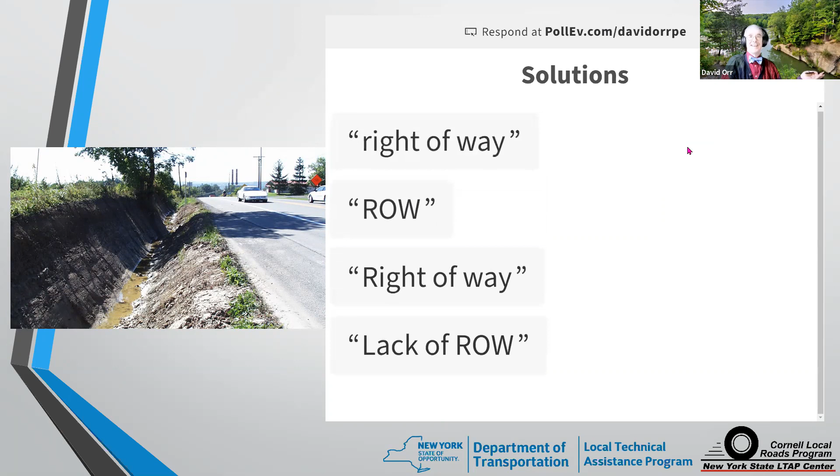Nice job, y'all. The right-of-way is tough because technically the right-of-way is only the part that's used and maintained by the local agency. It's not that 3 rods or 49.5 feet. Everybody wants to have that just under 50 feet. And you don't have it. Technically, you've only got what you've used and maintained. You can't go wider than that.

In this case, they had a fixed right of way. It was actually the top of that back slope, if you look carefully. I don't think this particular picture has it, but there's actually right-of-way posts. You can actually see them.

If you have to go wider for safety and/or drainage, work with the landowner. Yes, it becomes part of your permanent right of way. You probably should get an easement for it. Do people go outside that with a handshake? Well, there's times when we used to. We probably need to be thinking more permanent than that. But if you can get the landowner to be able to maintain it, maybe everybody wins. Not possible everywhere, but that right of way becomes an issue for us.

And yeah, you might have to fill that ditch in at some point. And there are techniques for filling it in that probably should be thought about and followed and used if at all possible.

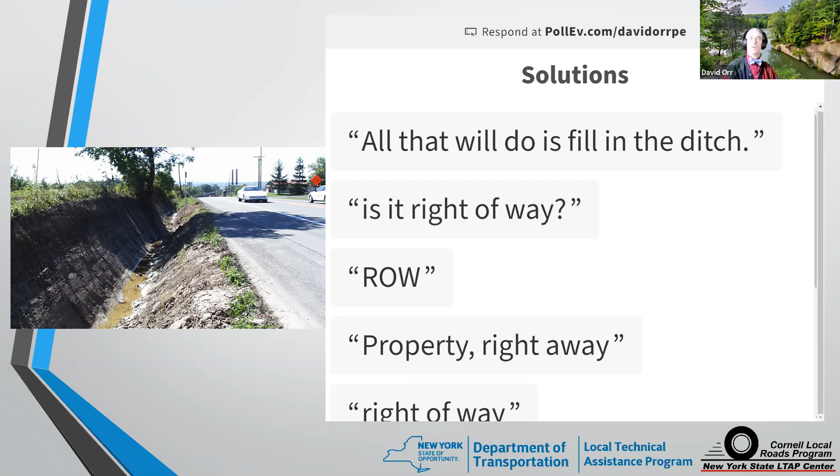And of course it winds up in a slope like this, and then we got a problem. Now we have to deal with all that debris and that washout. Maybe a series of check dams could have helped in some cases if the ditch is steep, things like that.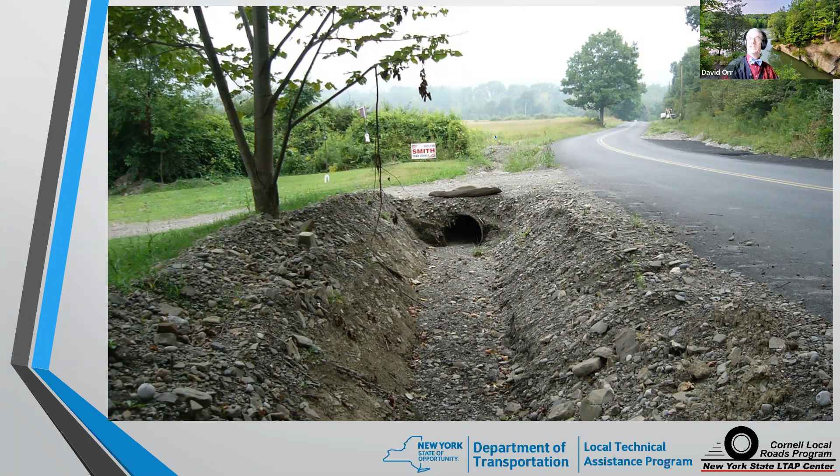So now we've got a side hill slope here. I'm going to ask you, what do you think the problem is, and what do you think is the solution? Let me, as soon as I get this moved over, let me clear the answers first. Okay, let me clear the solutions. There we go. So what do you think is the problem? What do you think is the solution here?

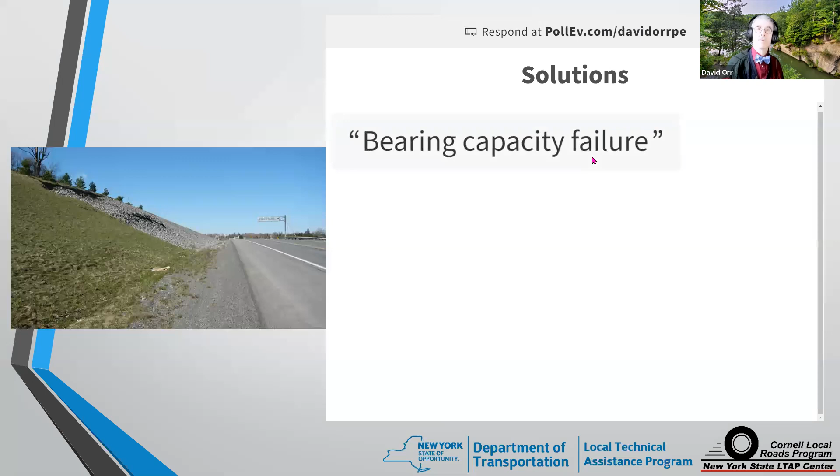It's a bearing capacity failure on the side slope. It's too steep, needs to be flattened. Some material in the cuts. Water seepage needs a cutoff ditch at the top. Somebody put in the Q&A that a larger stone might have helped. Water weeping out of the slope, perched water, bulging slope. There's no swale at the top of the slope, so the water that comes across the top gets underneath and causes it to fail.

All good thoughts. And this is the reason why, I keep stressing this because it's so important, we've got to figure out where the problem is occurring.

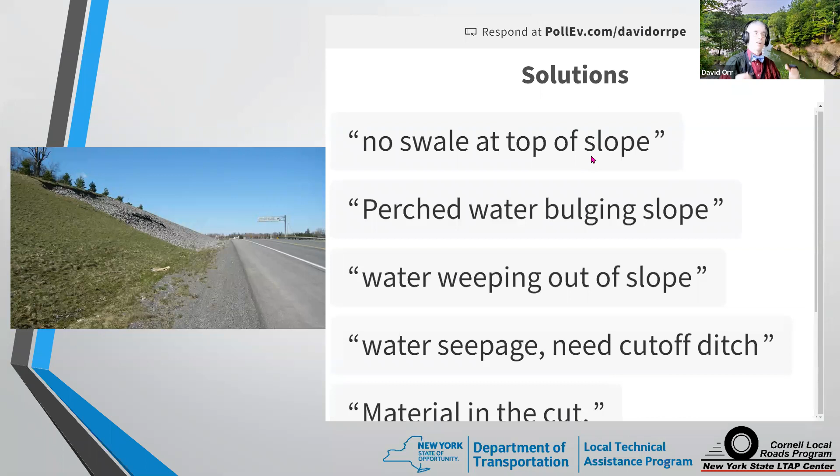If you look at a slope, okay, so we're just going to draw ourselves a slope here. Okay, so we've drawn ourselves a slope when my computer will let me. Doesn't want to fill that slope in, but we'll live with this. Okay, so we got ourselves a slope. That slope can fail in about 6 different ways.

One way, and I'm going to just draw a couple of them for you, I'll do them in black since I've got black here. It could fail because the slope isn't that steep, but there's just water problems. The water gets in underneath, it over pressurizes everything, and it bursts out. You just get too much water and it's soft, and the whole thing slides.

It could be there's problems at the toe of the slope, and you get the whole thing curving like that. You get a failure plane that comes underneath. It could just be at the toe of the slope, the whole thing sloughs and just pushes down. Or it could be too steep, and if it's too steep, obviously it's unstable and it can fail. There's about 6 or 7 different failure modes.

They usually occur along a plane, but not always. You can find that plane to intercept it, and then maybe you can save the slope. Most of the time, the thing to look for is to look at the slope itself, and it can help you figure that out.

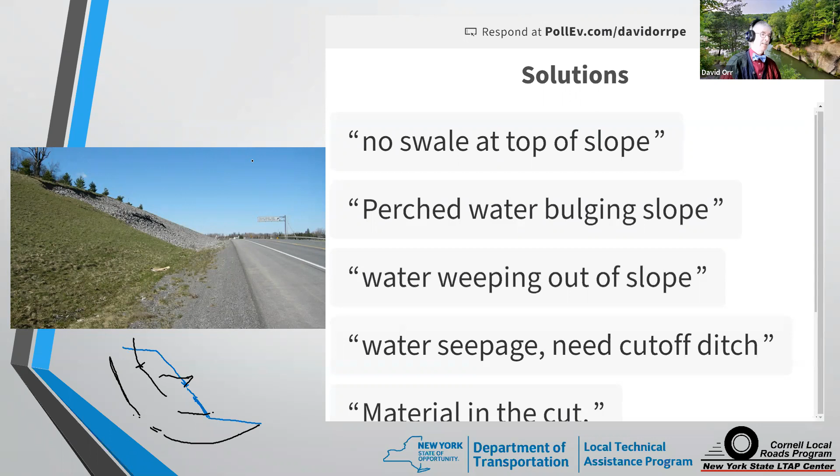Now, there's no trees in this particular case on the slope, but on our rural road system, there usually is some kind of vegetation on the slope, and that can help you. So we'll go and look at a picture here. Here's a slope failure.

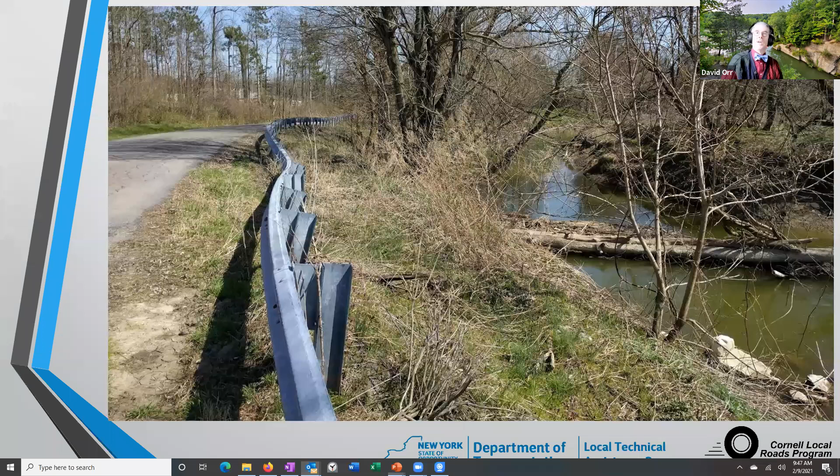You can start looking at the vegetation or the signpost or the guide rail post. They can start telling you something about what's going on. Now, got to be careful. In this particular case, there's some evidence that maybe some of the posts had been hit. But what do you notice about that first post in the photograph? It's tilted back a little bit. And if it's not because of an impact, maybe the whole slope is sloughing off downhill. If the post had leaned in, you could be getting a curl instead.

My advice to you, when you start getting slope failures, go get some help. Bring an engineer in, especially if it's a high slope. Think about where the failure is occurring and think about intercepting the failure plane. Don't just drive some posts down through it, you've got to be better knitting than that, something that really ties the layers together or gives you strength.

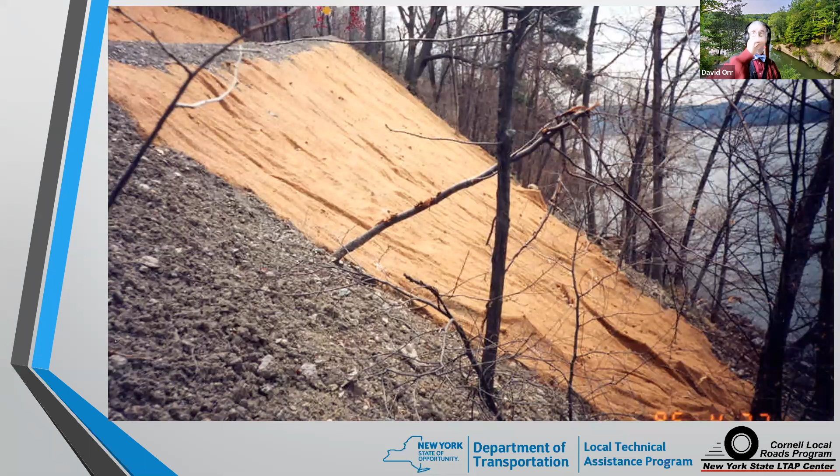And yes, you can protect some pretty steep slopes if you do it right. This slope is steeper than one-on-one, but it's holding up just fine 25 years later because there's actually, in this case, a geogrid in there holding it together. The geogrid's not the only solution, there's soil nails, there's vegetative solutions that exist. The idea, though, is if you start getting slope failures, think about where the problem is occurring. Don't just assume.

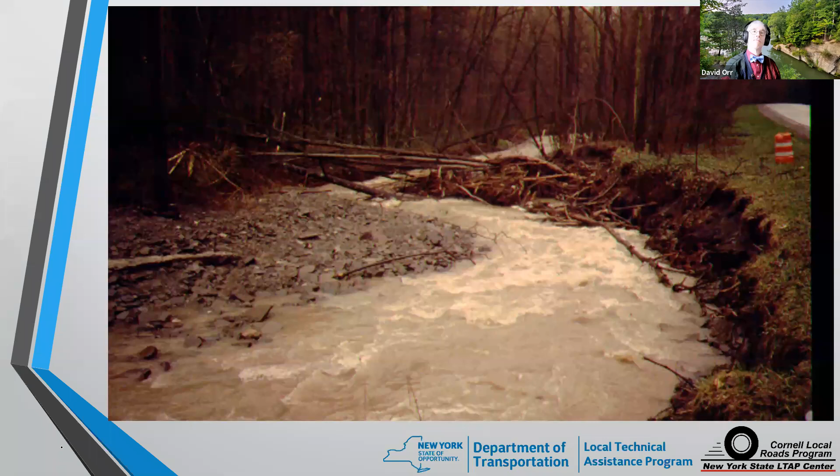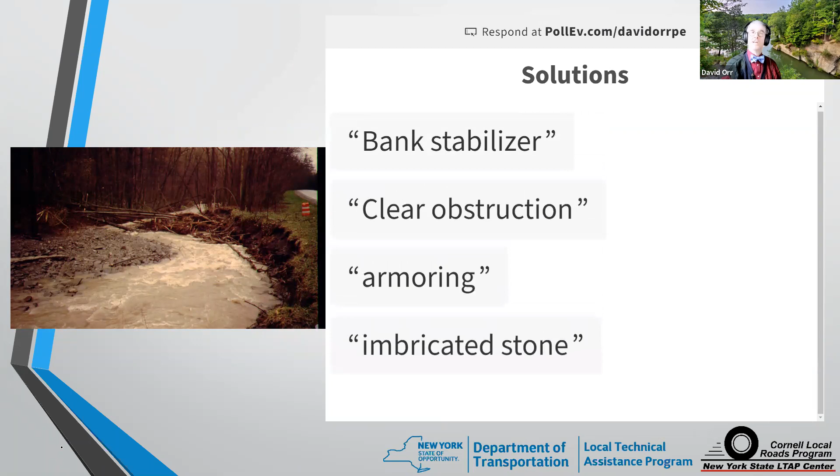So what do you think the solution is here? Imbricated stone, put yourself a bank along the side. Yep, armoring of some type. Clear the obstruction, but be very, very careful. Which obstruction is the one you want to clear? Bank stabilizer, some gabions, possibly. Again, figure it out. You might want to do some stream work upstream to fix the meander.

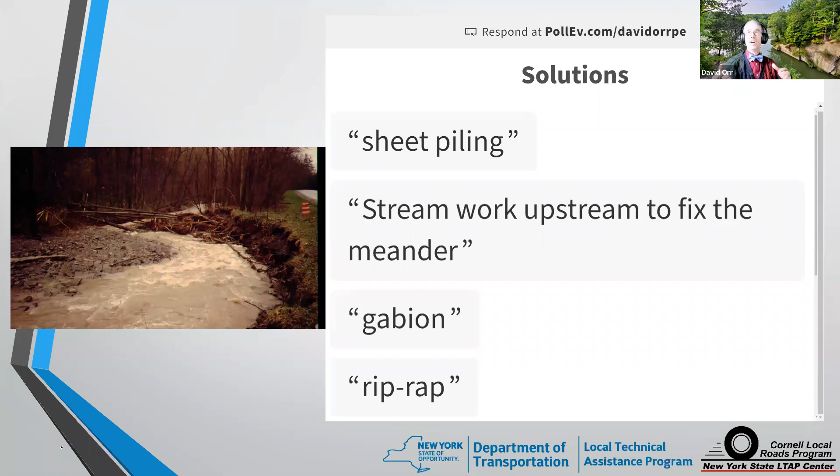You could use sheet piling. Again, work with the stream. Is the stream meandering normally, or is it actually pretty well fixed and just happens to be caused by those trees that fell and changed the whole stream's slope? Do I remove the gravel bar? Be very careful. My usual rule of thumb is I don't want to remove that gravel bar unless I have to. I'd much rather work on armoring the roadway properly, and then I can always come back in and do something later with that gravel bar.

And the reason is fairly simple. Okay, let's see if my pen will give me what I need here. So if we think about the stream from above, maybe it's a meandering stream. Okay, so it's like this. There's our stream, it has a certain length to it. If I drew that length out in a straight line, it might be as long as the line here that's decided it didn't want to connect.

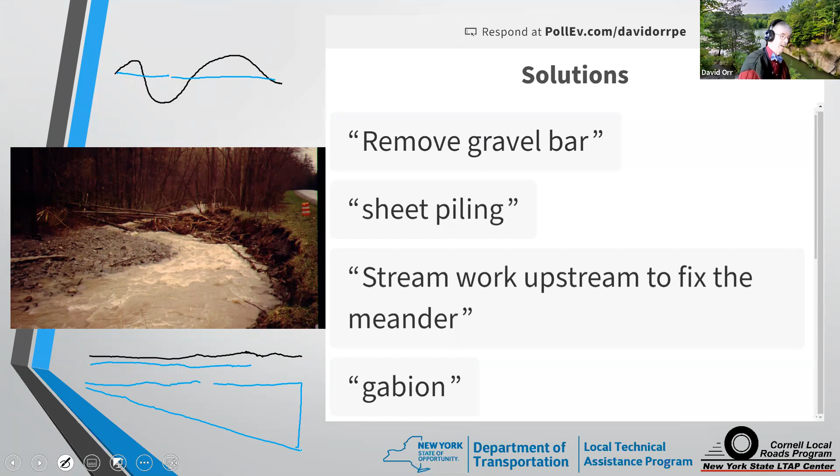If I straighten that stream out, give me a different color here, we'll go with light blue just for the sake of argument. If I straighten that stream out, I've shortened that stream up. The fall of the stream from point A to point B is still the same. So from the side, the stream should have fallen like this. But I straightened it up, and now it's steeper. I've increased the velocity of the stream.

Exactly. There's now more energy somewhere. There's more energy that's either going to cause it to scour up here at the top so that it can flatten itself back out, or it's going to create an erosion. It's going to fill in at the bottom when it gets past that steep point and maybe even create a scour hole as it does it. It's easy to push that problem downstream. You really need to look up and downstream. That's where soil and water can help, that's where engineers can help. But think about working with Mother Nature. It's amazing how well that can actually work.

If you came in here, in this case, I want yellow. Just remove the trees carefully. Don't touch that stream bank. Put in proper armoring here with good, what they call spur dikes at the end to protect the bank, and let the stream do what it wants to do. If you don't have to protect both sides, the stream can stay in its natural energy state and be in pretty good shape.

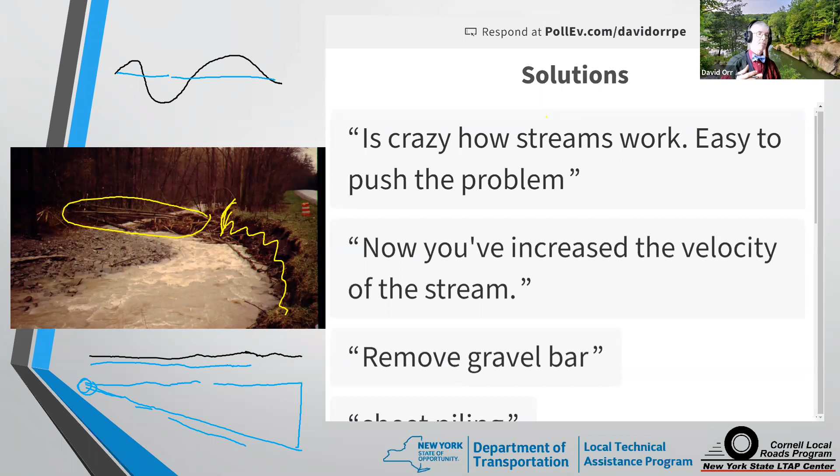Now, if you're wondering where all that came from, the research that showed all this and how effective it is actually came from after the Schoharie Bridge collapse, which many of you will probably still remember, back in 1987. One of the outcomes of the research for why that bridge failed was to help us really understand stream stability. And we improved the quality of our streams by quite a bit by not just straightening them out, but thinking about working with Mother Nature. Now, obviously, if you get a stream that's incised in a gorge, well, it's not going anywhere. So different problems, and you get a pretty picture.

Drainage problems really affect a lot of our roadway system. In one hour we can only cover so much, so we've got a few minutes left.

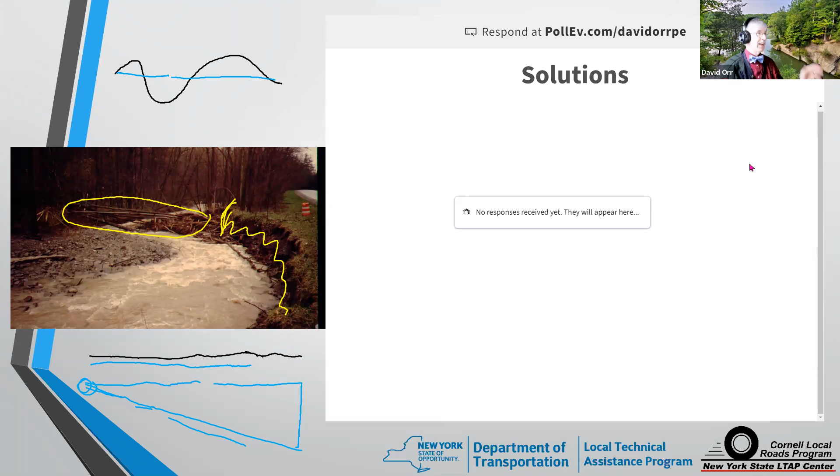Environmental regulation interference. That's a great question, and it's one where there's a catch-22. Most regulations swing the pendulum. We don't have them, we don't have them, then we have them, and they may sometimes go too far. We know that. The danger, of course, the risk people have is, well, what if we don't go far enough?

I just listened to a podcast on the Exxon Valdez, and parts of the regulations that were put in after Exxon Valdez probably went too far, but most probably didn't go far enough. And how do we know where that balance is? There's that pushback. And of course, we then have to deal with the consequences.

What I usually tell people when it comes to any issues with regulations: try to do the right thing yourself, and document what you've done. You don't need fancy documentation. I'm not a big fan of that, as many people know. But do the right thing so you can show you're doing the right thing and maybe help keep that from occurring. If you do nothing, then regulation comes down the pike, maybe too late, and you're going to have to follow through with something that may be a bit onerous. But keep in mind how that pendulum goes.

Someone asked, what's my take on headwalls versus no headwalls when it comes to culverts? I usually look at headwalls from an operational standpoint. From a capacity standpoint, headwalls only increase the capacity of the culvert to carry flow by 5-10% at best. Usually it's operational reasons why I would want a headwall, because it retains the fill, or maybe you can buy less pipe.